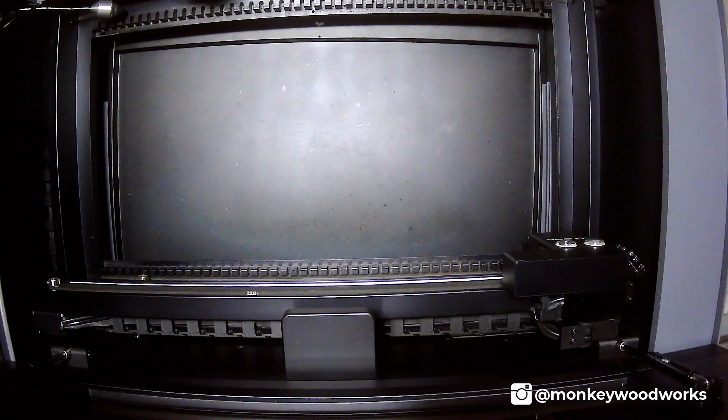Here we are looking inside the P2. As you can see, I have all the slats removed, the honeycomb is removed, and I do have the crumb tray installed. However, the crumb tray is lowered down 2 or 3 notches.

The reason is when I take my bowl and put it inside the P2, I want the highest point of this bowl, which are the corners here, about the same height as the slats if they were installed. This is going to allow the camera to actually get the best measurement of your curved surface.

Now that I have my height set up, next thing I want to do is make sure this is going to be square with the gantry so the engraving is straight on my bowl.

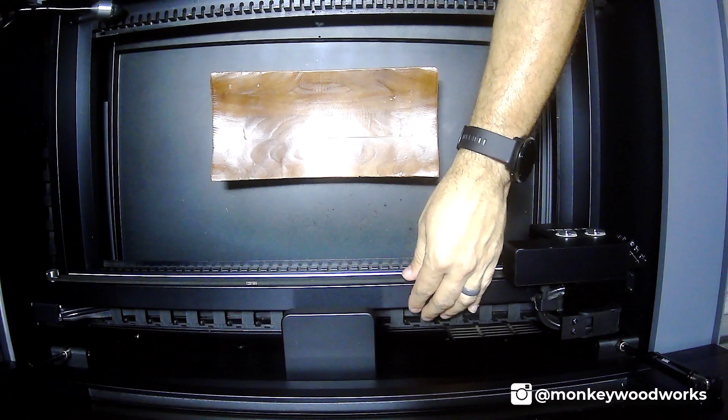One trick I found was with the P2 turned off, you can move the gantry by hand. You can take a piece of 3mm plywood and hold it against the gantry, push the bowl against that plywood, move it back and take that out. Now I know this bowl is actually square with this gantry.

Now, of course, if you had a round bowl, you wouldn't need to do that, but I did find this trick very handy to use when I need to engrave on a rectangular or square piece such as this.

Now that I have everything set up and this is in the middle, I can close the lid and head over to XCS.

Here we are in XCS. It has connected to the P2 and already refreshed, and I can see the bowl inside the P2.

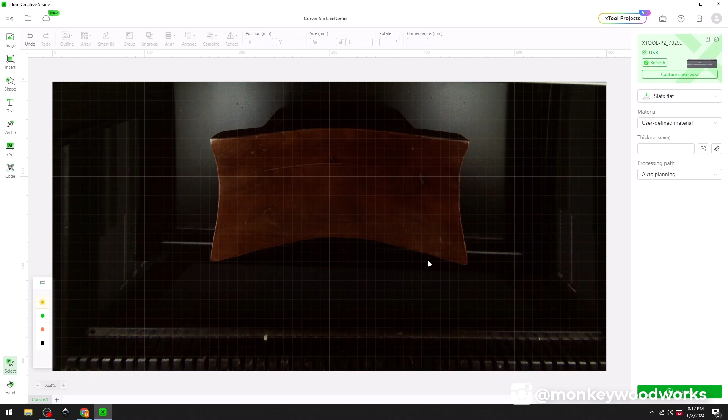One trick I found was if you use the curved surface, you cannot use the camera. So a way around that is if I put it in open plane and measure the distance down to about halfway through the bowl. This is the deepest part, this is the highest part, so I'm going to pick somewhere in the middle.

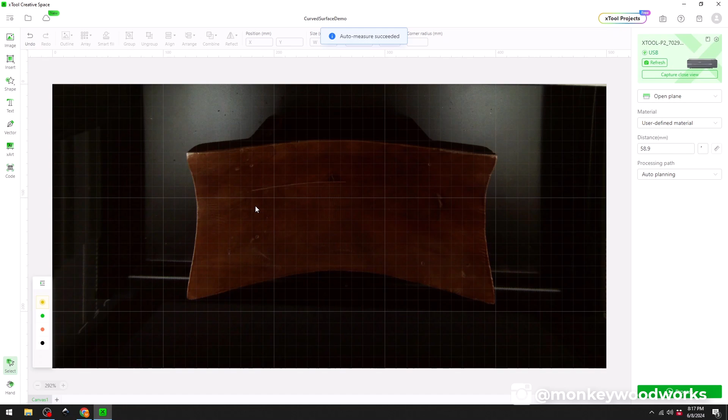That will set the distance to this. What that's going to do is actually allow me to use the capture close view and find the corner of my bowl, or an edge of the bowl if it were round.

Once you know that, I can actually take my object on the screen and sort of line it up with the bowl or the object that you want to engrave before you switch over to curve process.

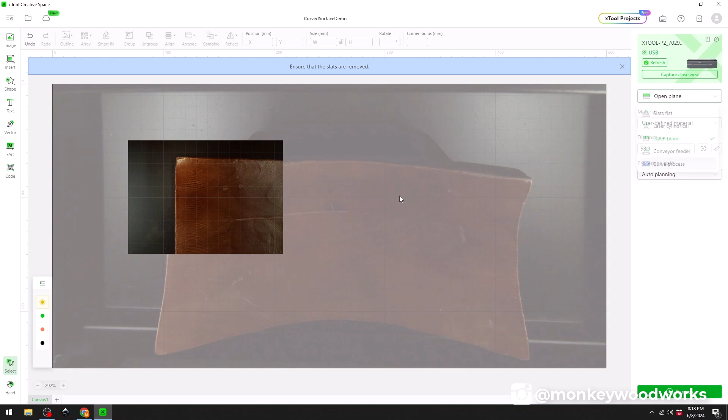Now zooming out, as you can see, I've already have my engraving set up. I have a rectangle here, this is 295 millimeters long, 140 millimeters wide. This is the size of my bowl. I'm going to move this up here.

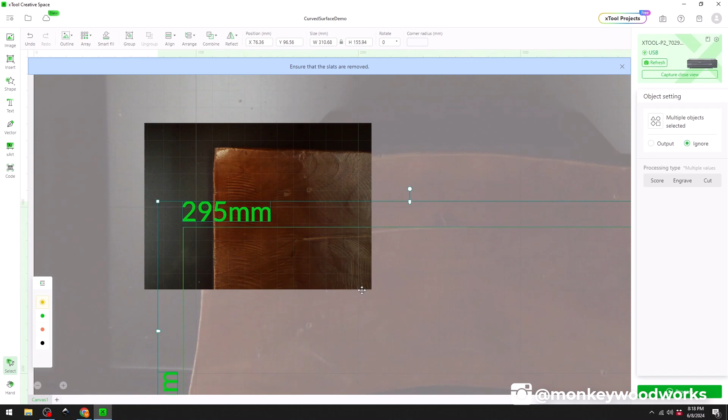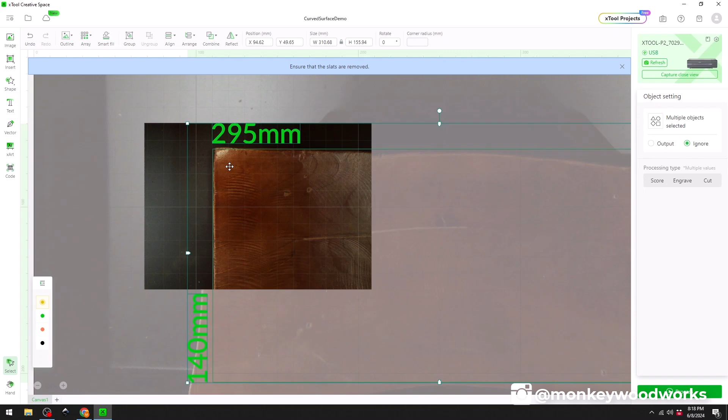Zooming in, and put it close to the edge of the bowl. Now that's not exact, but that's going to be much better than not being able to see the bowl at all. What I can do is check the bottom right hand corner if I want, use the capture close view.

And see how well that looks. And that looks pretty good. So I can move this just a little bit more, split the difference here.

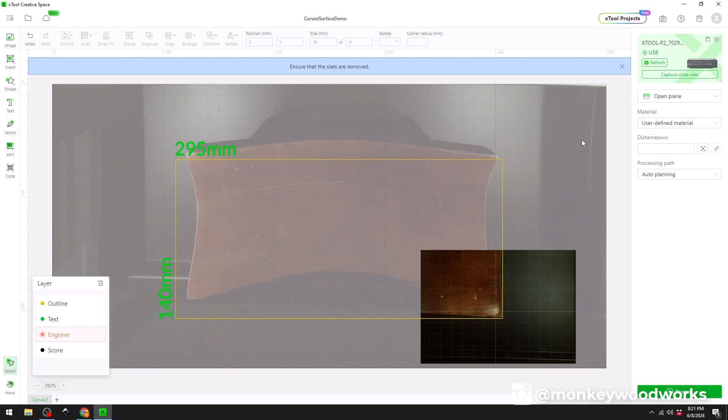Once I confirm my location using the open plane, measuring the distance, and using the camera, I can now switch over to curve process. Knowing that this rectangle is on top of my rectangular bowl, I'm going to move my 2 objects that I want to process on the bowl up here.

Now, as you can see, I have 2 different colors. One of them is set to engrave and one of them is set to score. I want to put them on top of each other, so I'm going to select them both.

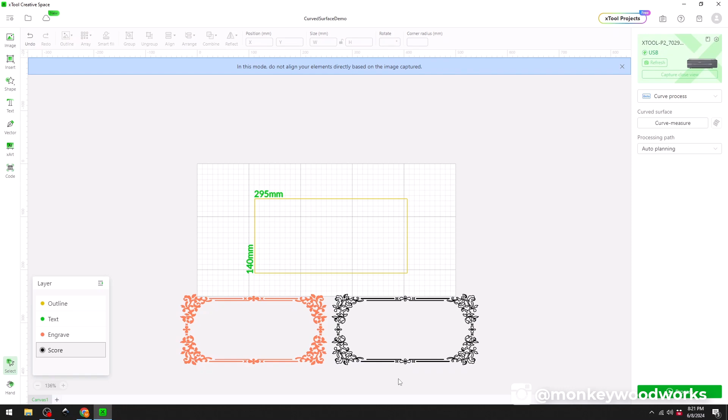I'm going to align horizontal and then align vertical. Now I know they're on top of each other. I'm going to go ahead and group them together, that way I don't have to worry about moving them around too much. Group them, and then I'm going to zoom in and make sure it locks in the middle of my rectangle.

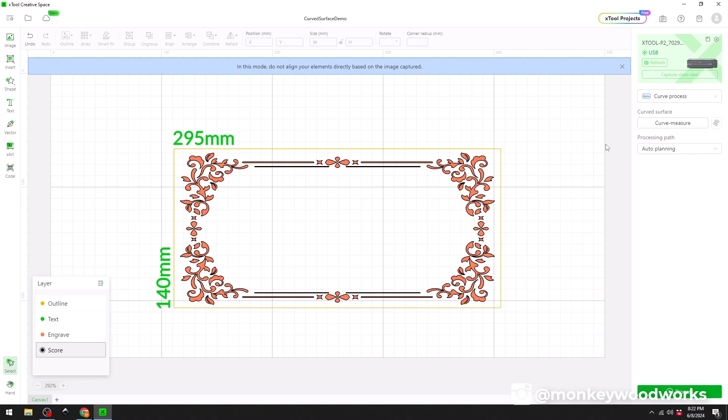The next thing I need to do is actually measure the curved surface and come up with a 3D diagram of what my bowl looks like. I'm going to select curve measure. So what we're about to do in the software is measure the curvature of the bowl. In this case, I have a spoon in my hand, and what it's going to do is measure the distance, how far down each point of this spoon is, or in our case, the bowl.

That's going to tell the laser head how far down it needs to go to stay in focus. Now the problem is, if you're doing a round object, let's say this were a round bowl, and you need to engrave around the edge of it, you have to engrave over here in the open where there's no wood, and it's going to fail because it will look further down and say it's too far, it can't measure that, and it won't let you process the image.

So a way around that is to stack up pieces of scrap wood or put something on top, like tape or something, to come up with a way to let the laser head actually hit something on the sides where there's nothing there, out in the air. That way it gets inside the bowl and has no problem seeing this, but you want to make sure it hits something on the outside edges. That's only a problem when you're actually doing something round.

In this case, we're going to be doing a rectangular bowl, so it's not going to be an issue. If I were to take this and wanted to engrave on this spoon, I would probably make a rectangle using the smallest part of this width here, and just measure from here to here, not worrying too much about engraving on the outside lips. If I did want to engrave the outside lips, I'd have to get creative and come up with a way to make this as wide as it is up here as down here, so it won't fail when it tries to measure the distance beyond here.

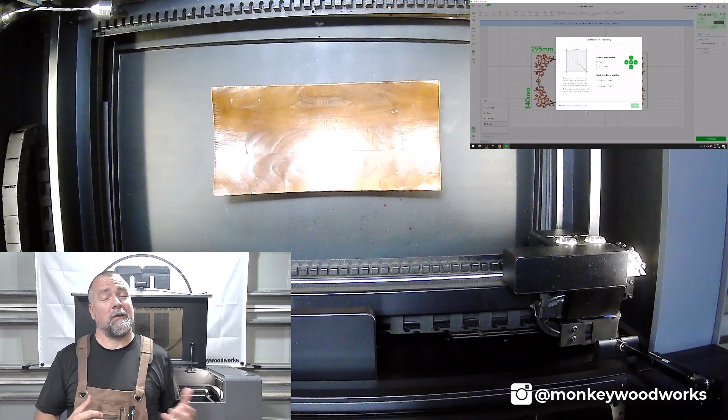So let's head back to XCS and let's measure our bowl. Now this is the part where I have to run around looking crazy, because my computer is way over here and my P2 is over here. So what I have to do is kind of go back and forth.

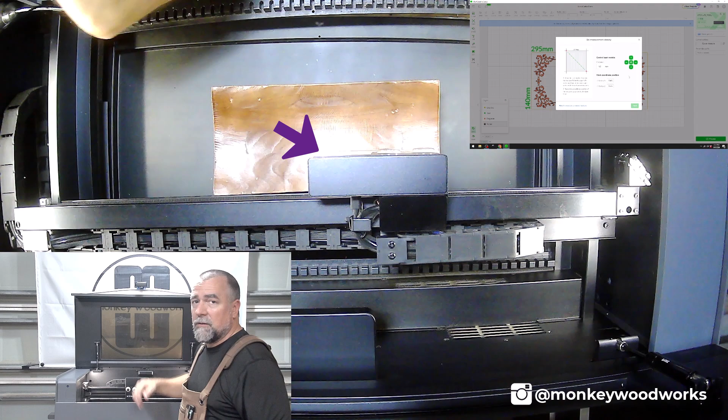I'm going to move my laser head using XCS with the arrow key, and then come over here to the P2 and look to see where the dot is. It has a laser dot shooting down, and I want to make sure I find the top left corner like it shows in the picture. So I'm going to move it 2 times to the right, 1 time down, and then come back over here, and the dot is actually in the middle of the bowl. So I'm way too far to the right and too far down.

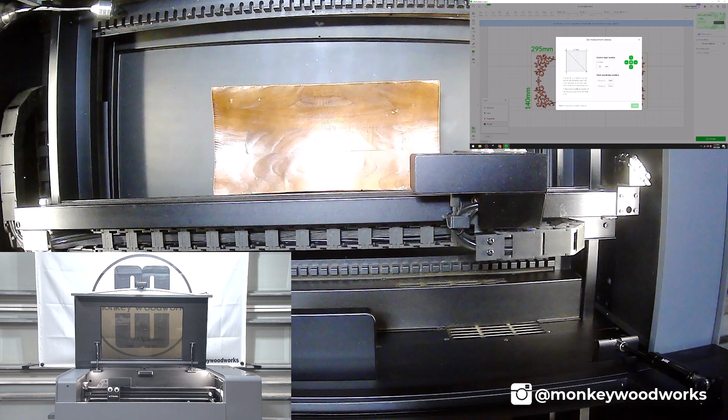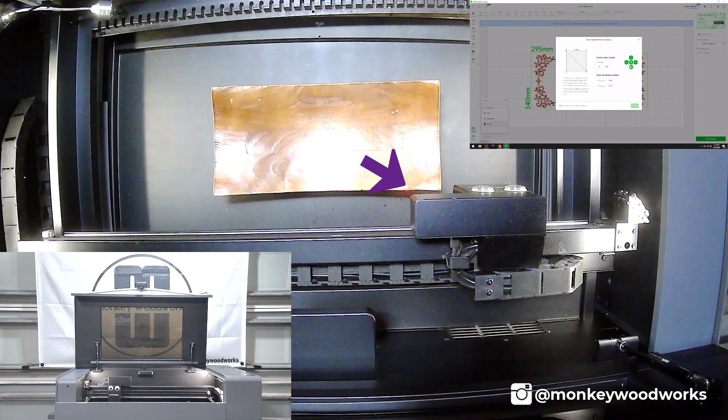So let me adjust that and see what happens. I'm going to go back, and now I'm going to go 50 up. Oops. Let's see what that looks like. Nope. Okay, I'm on the bowl. Now I need to go a little bit to the left. Almost.

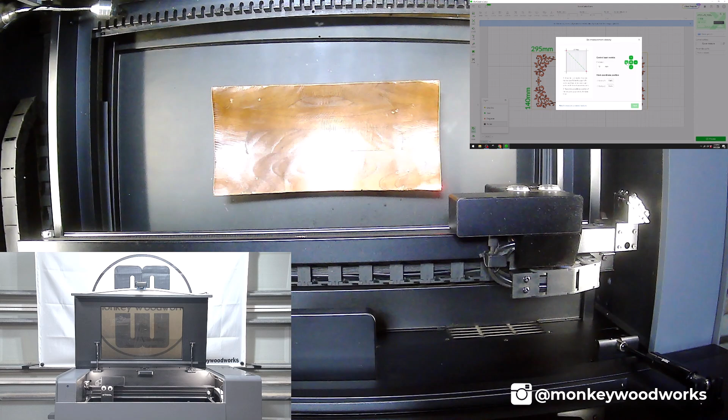This is a lot easier when you have your computer next to the P2. All right, now the laser dot is in the top left corner, where I want it to be. I'm going to come down here and click the mark button. That's going to tell XCS this is the top left corner of that bowl.

I'm going to repeat the process until I find the bottom right hand corner. Since I'm going to be moving a long distance, I'm going to set this back to 100 and start moving until I find this distance.

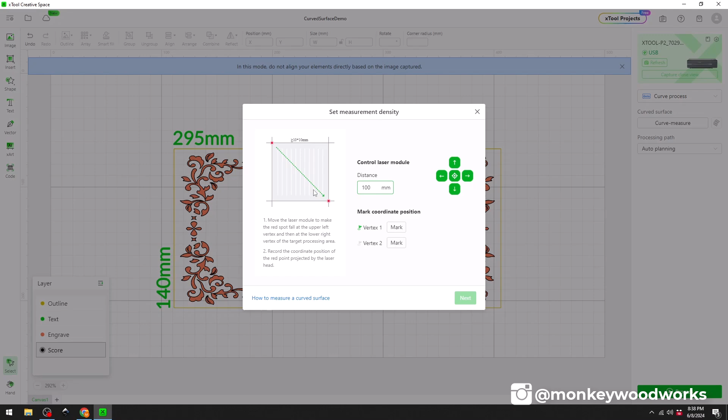Okay, so now that we've marked the top left and bottom right of our bowl, we're ready to close the lid and let XCS measure and map out the bowl. On this next screen, you have the ability to adjust the density of how much it's going to measure and how many points it's going to measure of this bowl. This bowl is really smooth, not too many jagged edges, so I'm going to lower this because I don't think I need this many dots to measure it.

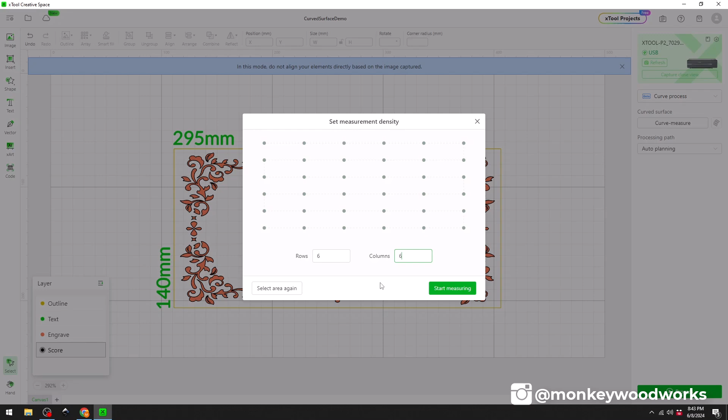So I went ahead and adjusted this to 6 rows and 6 columns. It's really up to you in deciding how many points you need to measure or how dense you want this to be. Depending on how complex your curved surface is, you may have to increase or decrease this. Now that I have this ready to go, I have my lid closed. I'm going to hit start measuring and wait for this to measure.

Here it is measuring. As it's measuring, you can see exactly where it's at. As it measures each dot, you can see it change color and move on to the next.

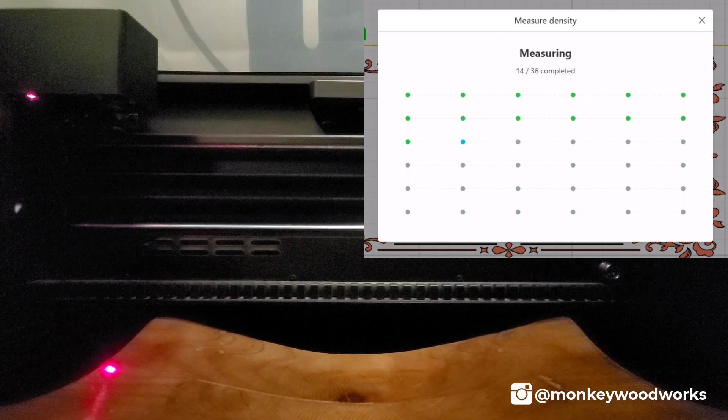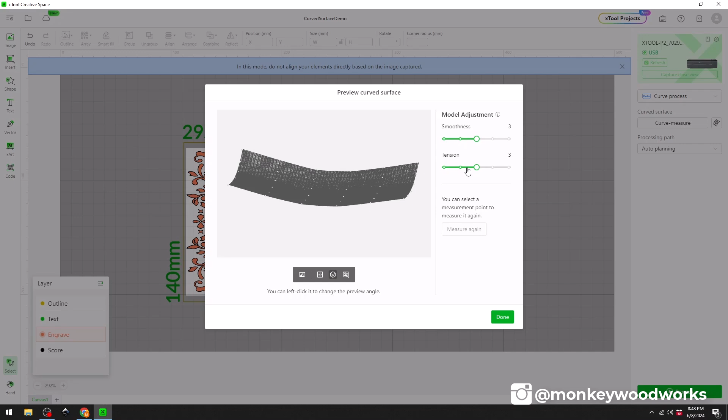Now that it's finished, it gives you a preview of what the curved surface mapped out to be. You can move it around using your mouse. You can adjust the smoothness if you want to make it a little bit smoother, adjust the tension, and also you have the ability to view your engraving or what you want to do on the object.

Clicking map, as you can see, this is what my engraving is going to look like on this piece. If you pick map and the object is not visible, that means you need to make an adjustment. You can come over here and click done, and you can make an adjustment to your object. Whereas if this object was outside of this white area, this is the mapped out area.

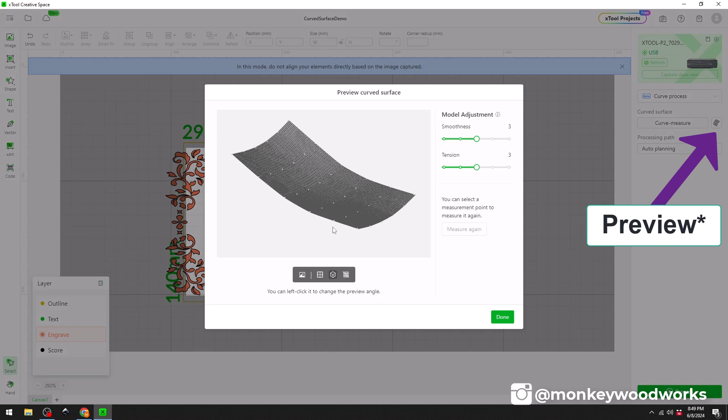If it were outside of the area, let's say it's way over here, and if I come over here to remap it and click on map, it's not going to work, saying there's no element because this is outside the processing area. It's not going to work. So I can go back over here, readjust this, and click on the preview again, click on map, and now it's going to work.

A couple of things about this curved surface process: the curve measure can only be done once. Once you do it, it's measured and you cannot change it. If you want to change it, you have to start all over again with the curved surface process.

You can preview it by clicking this again. However, once you pick this, it's going to wipe out what you previously measured and you'll have to start over with the curve process measurement. Also, if you save this and come back later, the curve measurement is gone. You have to start over on the curved surface process from the very beginning, finding the top left and the bottom right.

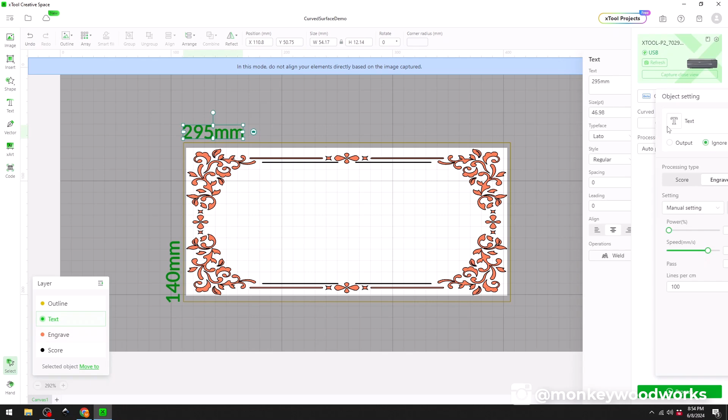Okay, I have everything set up, ready to go. I have the outside objects turned off. I have the inside objects turned on. I can hit process. I'm going to hit start. Hit the button on the P2 and away we go.

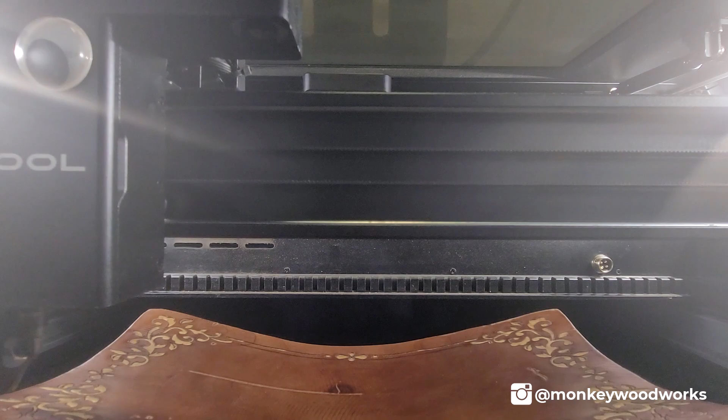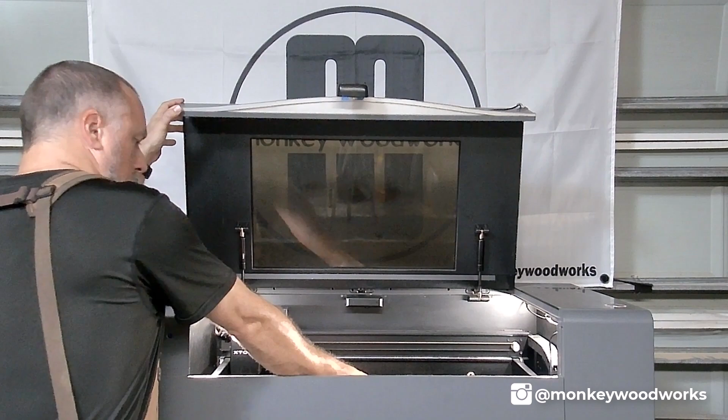Well, here she is. There's my final product. The curved surface feature works really well on something like this, and it also works great on any bowl, whatever object you want to do with that. It just has some limitations.

If you check out the xTool website, they'll show you what limitations it has. It can't be a greater angle than 45 degrees, because that nozzle needs to be able to get down in there and focus on it. Also, when you're doing that round object, you need to make sure you put some scrap material or maybe some masking tape around that piece so the laser can hit it. Even though you're not going to engrave on it, you still need to hit it so it doesn't fall off, and so it can actually focus and build that 3D mesh to set your engraving to it.